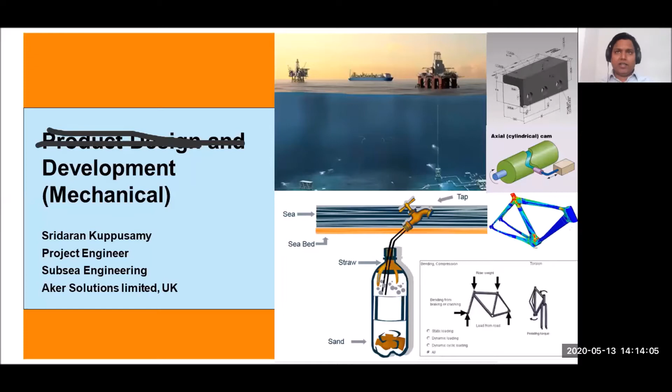What are the requirements of the standard, you can ask. Standard basically specifies the major design or qualification requirements of the product. So if you are selling any product, we can say our product is tested to SAE 1045. Each standard has different numbers, so it's qualified to that number. That's what they use when selling in the marketing perspective. This is used when competing, because when a product is compliant to ASTM or ISO standard, that will be more valuable than others, since the standard requirement is very stringent for the product to be tested.

So product design is the concept, which we deliver as the drawing, and the development is the execution, which is various processes that we go through step by step. Just as you can see the image on the screen, there's a subsea.

I will introduce what is subsea, and then we will go into the product. Maybe you may not be aware more about the subsea.

So we can say this is a rig - this is the semi-submersible rig, this is the floating rig, this is the fixed rig. You can see the structure. Basically, you might be aware of the top portion, but there's a lot of engineering below the sea level that I will tell you about.

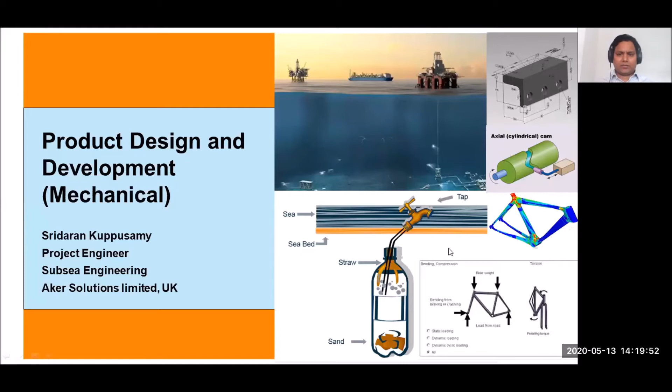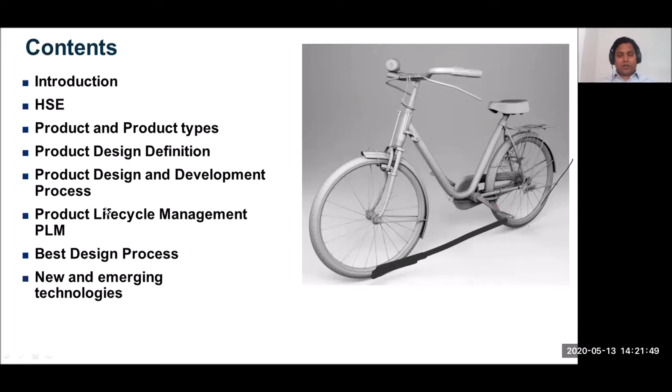Some of the terms you may not be aware of, and next you will see new and emerging technologies - the current situation and requirement of the manufacturing industry, and their expectation from engineers, because it's a volatile market now. There's a lot of change happening everywhere, and we need to adapt to that change. That's the market we will go through in new emerging technologies.

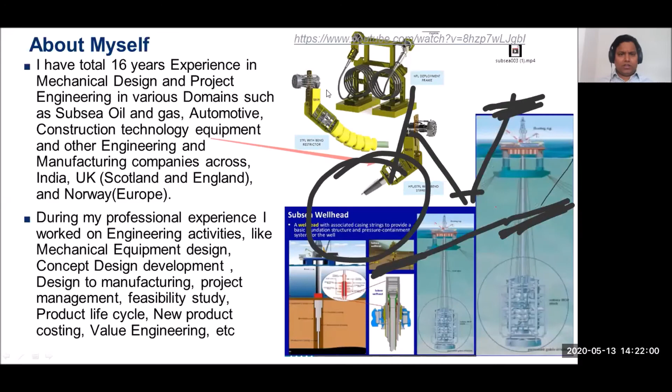Okay, so yeah, already Johnny told about myself, but I will tell you again my experience.

I have 16 years experience in mechanical design and project engineering in various domains - subsea, oil and gas for 10 years, and also automotive and construction technology equipment. Construction technology equipment, like the ones used for excavators, for the building process - you can see Ingersoll Rand machines, excavators in roadside works, even bulldozers. That all comes under construction technology equipment.

I also worked in various manufacturing companies. I worked in Scotland, England, and Norway, and India - India is my first experience country, and I worked there around six years.

During my experience, I worked in the complete product life cycle, starting from concept design to manufacturing. Also, now the requirement from the client is cost reduction, so value engineering is a top priority - how the product can be made cheaper while maintaining the quality, and also the fit, form, and function same. That's a requirement from most clients because of the volatile market.

So this is the product which I am working on as subsea - this is the distribution equipment. So basically...

Sorry, just I want to check - can you hear me? A little bit louder, it will be fine. Okay sir, yes sir, just check my volume, bear with me a second. So how about now? Yes, now it's fine. Now it's fine, right? Okay, yeah.

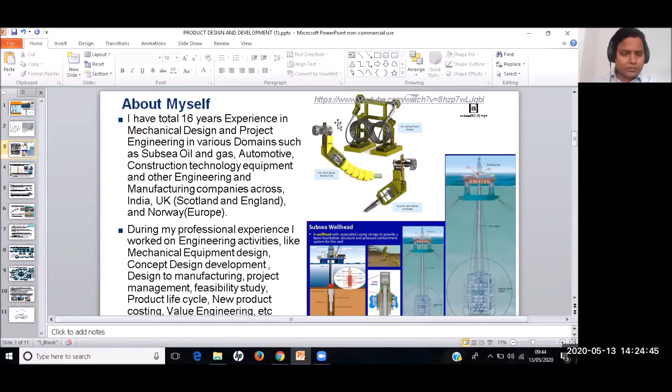Currently I'm working on the products, the hydraulic flying lead - this is the distribution equipment. Subsea technology is a vast field, no one is an expert in the whole field, there are various work packs. Like the top side here is mostly instrumentation, and also mechanical, a combination of mechanical and instrumentation - the top side, this is one. There are various forms of layout. The one which is shown is the drilling stage. The one in the first stage I showed is, sorry...

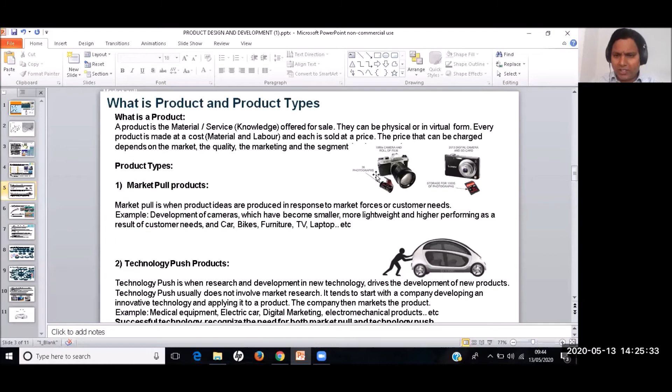So this is the production stage of where they will extract oil, whereas this is the one which is the drilling stage. So the layout will be totally different.

So in this they say the blowout preventer will be there. Because during drilling operations, there will be a burst of high pressure of things about to come outside. So there will be a lot of valves inside, different types of valves and shear rams, to control the high pressure from the well. So yeah, there are different types of layout while extracting the oil.

The first stage is the drilling. So this is the drilling. After drilling, for production, they will completely remove this BOP and then install the tree. The tree consists of valves and is connected to the well and they can control it. What happens is this is the top of the sea surface and this is the sea bed.

Depending upon the location, the depth of the seabed to the top of the rig will vary. So basically, if you see in the Middle East, they don't require this subsea setup. They can drill from the top level. They can reach within 500 meters or less than that, and extract oil, so they don't need this subsea.

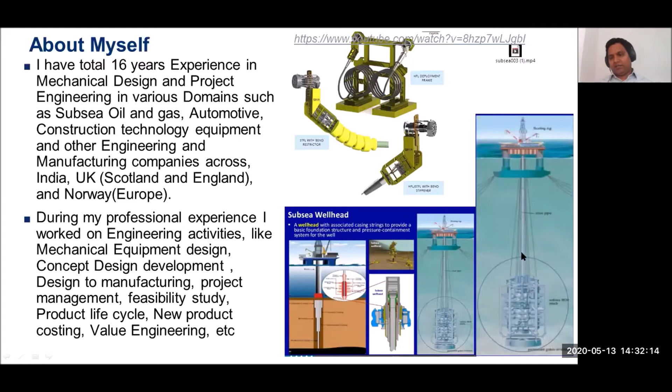Only we can see in the topside, but based on the requirement, it will change. Yes.

Health, safety, and environment. This is the topic I just want to discuss - why it is important for design. Whenever we create any design, we need to consider health and safety. The product needs to be compliant with health, safety, and environment. That will be the good engineering requirement. Otherwise, if something happens, that will cause more damage to people and the environment, and also cost-wise it will be damaging.

So it's important that the company follows safety procedures, standard procedures, and guidelines. For example, if you are doing any pressure testing in the wall, the area needs to be fully covered, and no one should be allowed inside the pressure testing area. Only authorized persons should be allowed - that's a requirement, and that's a factor we need to consider. Even for simple things, we need to always be in the HSE mindset when we create a product.

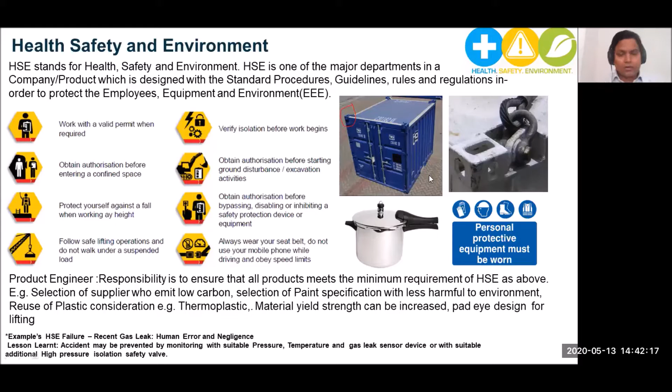Next slide. So what is a product? Product is a material. Material doesn't mean just stainless steel or carbon steel - this is the material we refer to in the manufacturing industry. The material is the item or good.

In some industries it's knowledge - in the IT industry, for example, they develop codes and sell it. Even IT support is also a product. So all products involve cost. The material is the physical part - that's the material cost - and the labor, the person who works on the product to the final finished part, is the labor cost.

So cost is different from price. Price is a marketing perspective - in terms of competitors, they decide the price, but cost is different. When we design a product, we calculate the cost based on total number of parts and the material. During initial design, we do a quotation and ask different suppliers, checking who can offer quality, cheaper price, with all fit, forms and functions, with minimum deviation within the available tolerance.

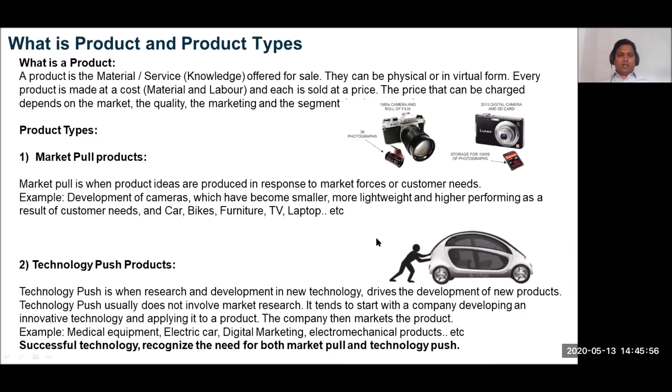After the steam engine, it came to gasoline, petrol, diesel engine, then hybrid. Now they are looking for a hydrogen cell or battery operated, but there are quite drawbacks between hydrogen fueled vehicles as well as battery. Even the battery needs lithium, which emits some carbon, but if they use hydrogen, they need to use a lot of water resources. So each one has pros and cons.

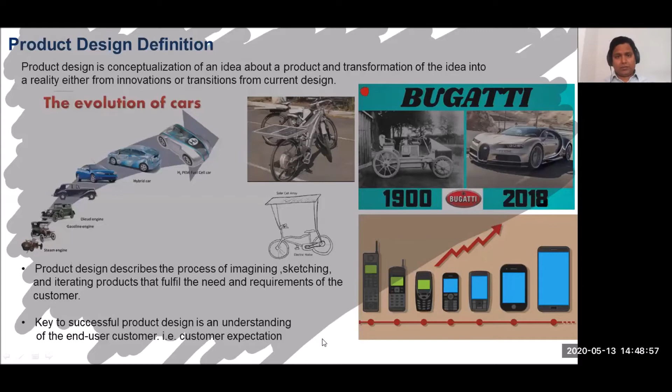People from marketing might be getting feedback. Tendering is when they get a quote from the client. Engineering is the group of people - there will be engineers, quality engineers, engineering managers, and also product engineers.

Who will work together for the concept. The benchmark is when they compare their product with the product which is available, and if any innovation or change is needed in the product, that's the whole idea discussed during idea development. They call it the proof of concept - it's like a virtual product they do in the CAD model, then they go for discussion and also implement lessons learned. So everything happens during idea development.

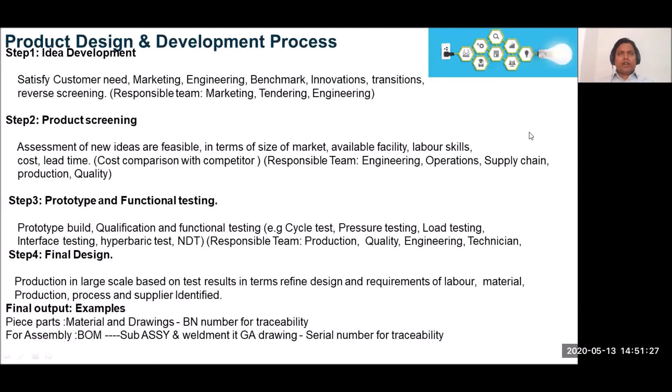And then lead time - how about the lead time, if they order the product, when will it be delivered. If they're asking for any valve, the customer client asks what's the lead time, the delivery date needs to be say 8 to 12 weeks. So how they decide the lead time is based on the long lead item.

So suppose for example, for the valve, the body is quite complicated. For machining the valve body, it takes 5 weeks. On top of that, after the valve machining, they need to go for inspection and QC. If they do any welding, they need to consider everything, and then they fix the lead time.

So that's quite important. Suppose, any product, even Apple - we can ask what's the lead time. If they say they're going to release in September, they need to consider all the parts.

The manufacturing should be passed, and then QC passed, and then their functional test to be passed. That's the lead time.

The next one is the prototype build. The prototype is for R&D, or if doing new part design, then you'll build a build. During the build, maybe due to manufacturing, they can't manufacture with the size which is required.

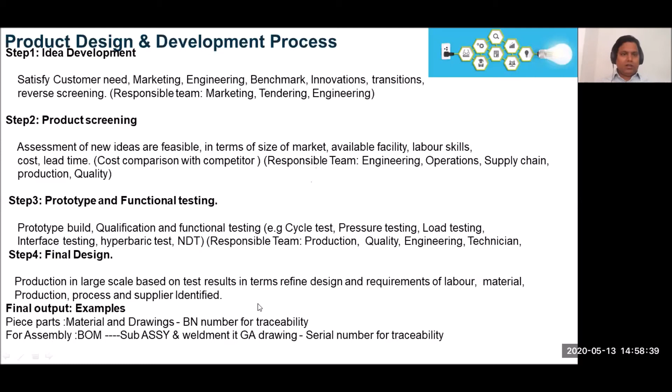So this is the overall picture about the product design and development. Next we will be going through the product life cycle.

This is what a manufacturing company usually follows, from concept to final delivery. So the idea development stage.

Then in this stage we will be creating a manufacturing drawing. While creating the manufacturing drawing, we will be selecting material, checking which material will be suitable for the purpose. If it's a valve, we can check the competitor, how their products perform in the market, and then check the cost by sending for a quotation. It's a big process.

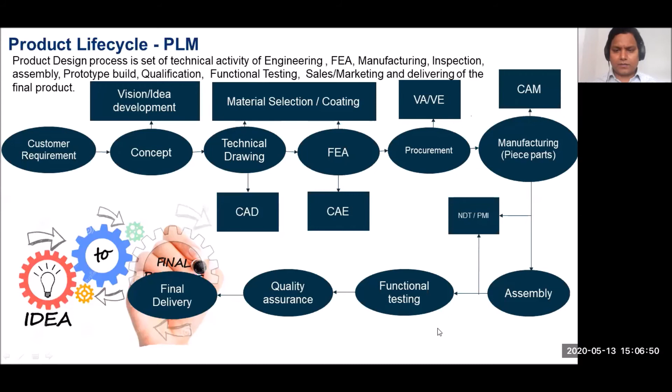What are the operations required for? For example, if it is a valve, there will be a number of parts. So long lead items plus QC, and then testing. They need to consider functional testing, and then including QC and then QA. Based on that, they will plan the project.

And if all the parts will not be manufactured, they buy it from outside vendors. So they look at the technology and who can provide, who can satisfy their requirement.

These design reviews are quite important for engineer design, product design. So the design review is the one where our key expert will be sitting, and the engineer who was involved in that concept will present the design to the chief engineer. Suppose if it is a valve, it can describe the pressure and whether the valve will be capable of withstanding the pressure, and then whether the flow rate is okay, the required flow rate of the valve. Everything will be checked in the design review.

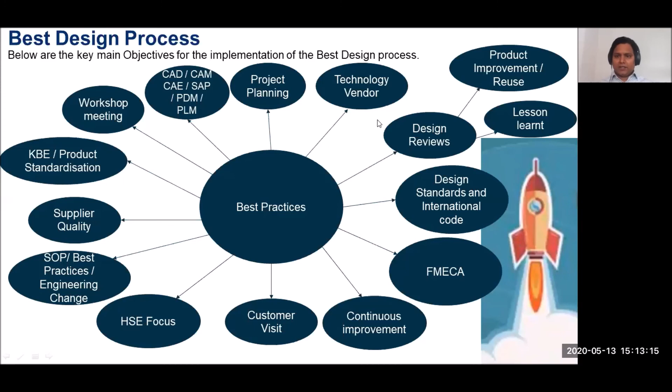New emerging and rapid changes in technology—manufacturing companies are mostly focused on improving the product, reducing cost, and becoming more efficient within a shorter lead time. So they're looking into new options, such as 5D manufacturing. Normally in CAM we do 3D manufacturing, but 5D manufacturing is one where, for example, a human face is created in the CNC machine—that's the fifth dimension. Just for example, you can see.

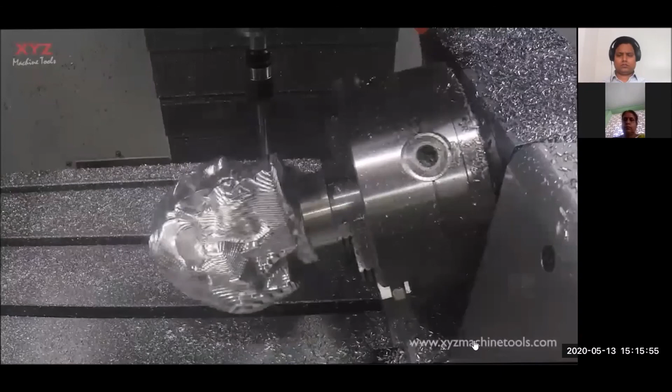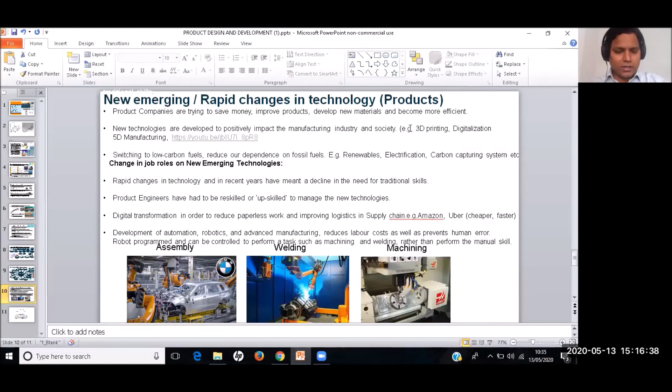Product companies are looking into manufacturing companies exploring new options like 5D manufacturing, digitalization, and also 3D printing.

That's also currently in discussion. There will be some drawbacks in 3D printing and 5D manufacturing—if you want to manufacture high volume, it takes some time.

Depending upon the project requirement, we need to consider this. The product engineer needs to think about this and then decide.

Which option we need—also, industries are looking into low carbon and want to reduce fossil fuels like coal and oil. They are looking into electrification and carbon capturing systems as a focus.

So there will be a change in job roles with new emerging technologies. In future, traditional skills will become outdated.

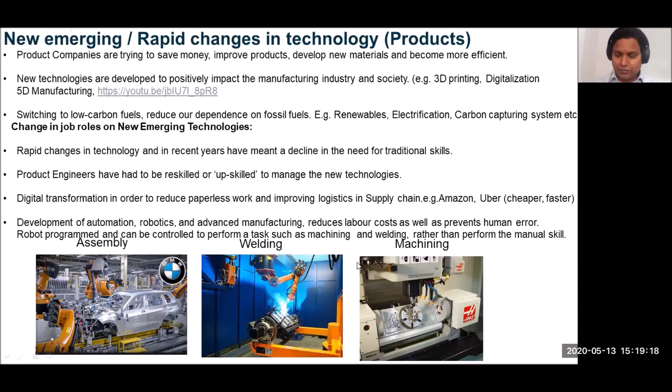Finally, that's the end of the presentation. Any questions?

Hello, yes sir. Let's wait and see if anyone is interested in asking a question.

Okay. Okay, sir, okay, thank you sir.